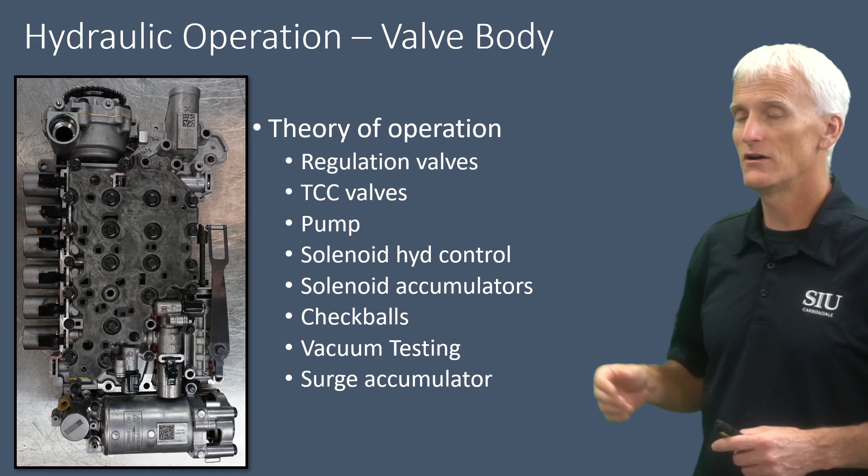We're going to look at some of the checkballs that they've got, really just pretty much where they go, do some vacuum testing, and then also look at this device there at the bottom. It's called a surge accumulator.

Starting out with the upper valve body, these are the valves that you'll find in that valve body. I've got them disassembled and kind of laid out. We're going to talk about a few of these things more specifically.

This clutch exhaust backfill is kind of an interesting valve there, and you're going to see that it pretty much holds some pressure into clutches when they're not applied.

We're going to look at the torque converter clutch valve, the lubrication regulator valve, the torque converter clutch control valve, and then on this end we've got the default override valve, actuator feed limit, which is a pretty common valve that we see in a lot of General Motors transmissions, really any transmission that has solenoids.

And the line pressure relief valve, that's a big spring with a ball behind it. And then the pressure regulator and the shuttle valve.

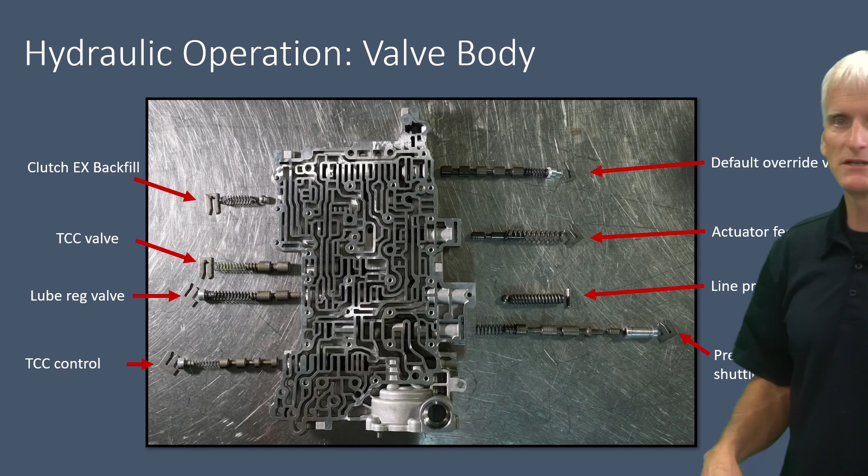The shuttle valve is something we'll pay close attention to because some of the aftermarket companies have created a replacement or drop-in item for that shuttle valve.

This picture just pretty much shows it at a different angle. This is our default override valve. If you take a look at this end plug here, it's got like a little stem on it, and that actually faces out. This actuator feed limit valve is not that uncommon.

We see that in a lot of different transmissions, and they feed the solenoids with pressure. Not every solenoid in this transmission, but many of the solenoids are fed through AFL, actuator feed limit. And there's a healthy spring that kind of works with that valve to create actuator feed limit pressure.

This is our line pressure relief valve. So if our line pressure ever gets too high, that will lift that ball off of its seat and relieve that pressure. And this is our pressure regulator valve.

So we've got a pressure regulator valve, and then down here we call that the shuttle valve, not to be confused with the boost valve. We see a lot of transmissions, a lot of these GM transmissions have these aluminum sleeves that have a boost valve in there. That's not what this is.

Now, line pressure does come around and sample on the end of this valve, and it does work up against this pressure regulator valve, but unlike a traditional boost valve where you might have a solenoid working against that boost valve, they don't do that on this. This is just a small valve that line pressure gets delivered into and works on this.

We'll look at these fairly close, so this isn't going to be the last you hear of these different valves.

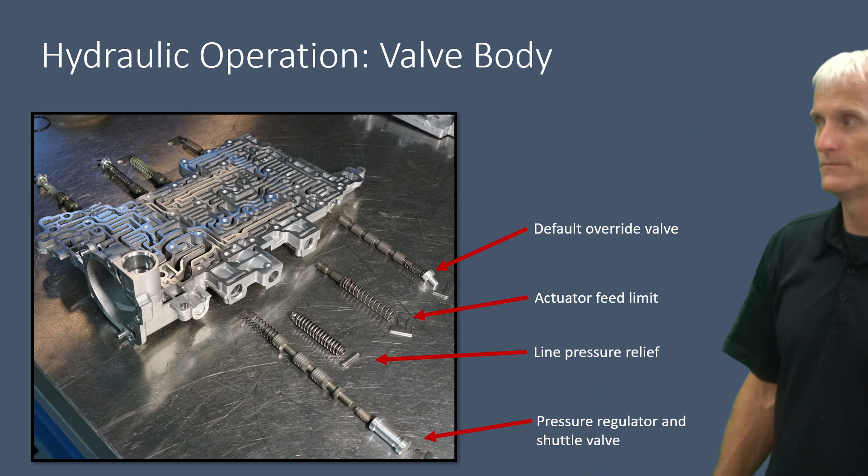Looking from the other side, once again, there's my clutch exhaust backfill, they call it, and it looks kind of like a pressure relief valve like we saw on the other side of the valve body with the line pressure relief valve, and it is.

It's just a check ball that's got spring force behind it, and the pressure that leaves this circuit here is going to fill what they call their clutch exhaust backfill circuits. Any clutch that's released, if it has the provision for it, is actually going to be filled with this clutch exhaust backfill. And then we have our torque converter clutch valve, our lube regulator valve, and our torque converter control valve.

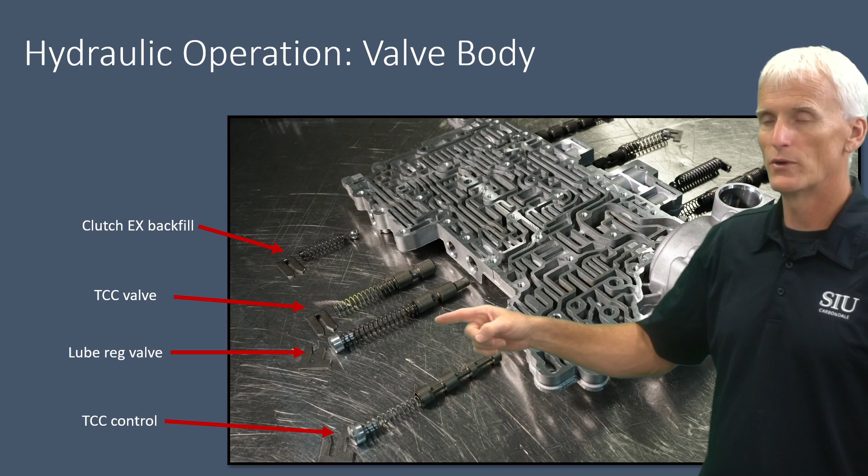Some of these valves you're going to see are addressed by these shift kits that these companies have, like the TransGo shift kit for the 8L90, or the zip kits, or just the individual valves that you can replace with Sonnax.

Now, looking at that actuator feed limit, if you've worked on General Motors transmissions, you'll know that the actuator feed limit circuit is nothing new. We see it on pretty much any electronically controlled transmission. And the term actuator feed limit can be misleading - it's really a solenoid feed limit. So what it does is receive line pressure, and that line pressure finds its way into the AFL circuit.

You can see the arrows going around, and pressure goes through this orifice number 12 and works against the end of the actuator feed limit valve. So once enough line pressure finds its way into the AFL circuit, it works up against the reaction end of that valve, and eventually moves its way over and cuts off the passage that feeds it.

Now, historically, the actuator feed limit circuits on these GM transmissions have had issues, basically with bore wear. The actuator feed limit spring is a fairly stout spring, usually with quite a bit of tension on it. And coupled with the fact that this is a balance valve, which means it's always balancing spring pressure and the pressure it lets into the circuit.

In this case the actuator feed limit pressure here - it's balancing these two. Once this AFL pressure gets up high enough, it cuts itself off, and then when pressure bleeds down, the spring returns it over, letting more line pressure in. So the fact that it's living in this position and maybe oscillating back and forth causes all the wear to occur pretty much where we see this valve positioned.

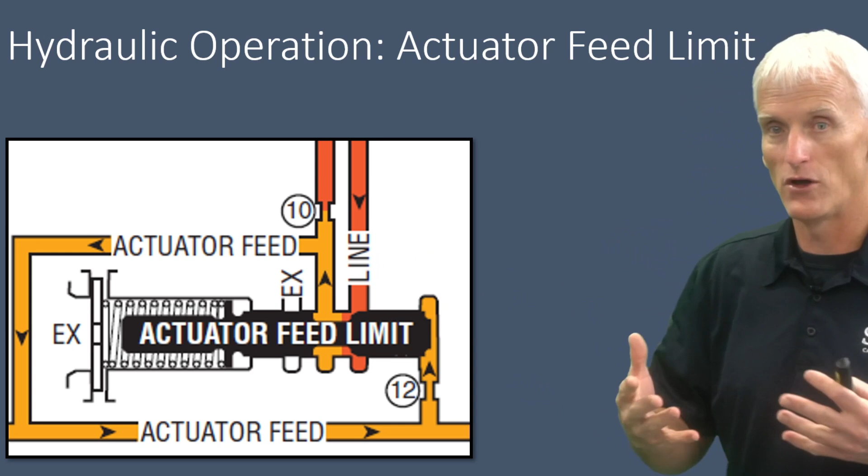So right now, the aftermarket - Sonnax and TransGo - as of right now, they're not addressing the AFL. Apparently it's not wearing that much on the 8L90. That's the only thing I can assume. Or maybe the addition of this number 10 orifice is keeping it fed with enough steady fluid volume that they're just not seeing pressure drops in this AFL circuit. Because this section right here is not something I've seen before, so I don't think it's very common, where they've actually got an orifice there that keeps the actuator feed limit circuit charged with fluid pressure.

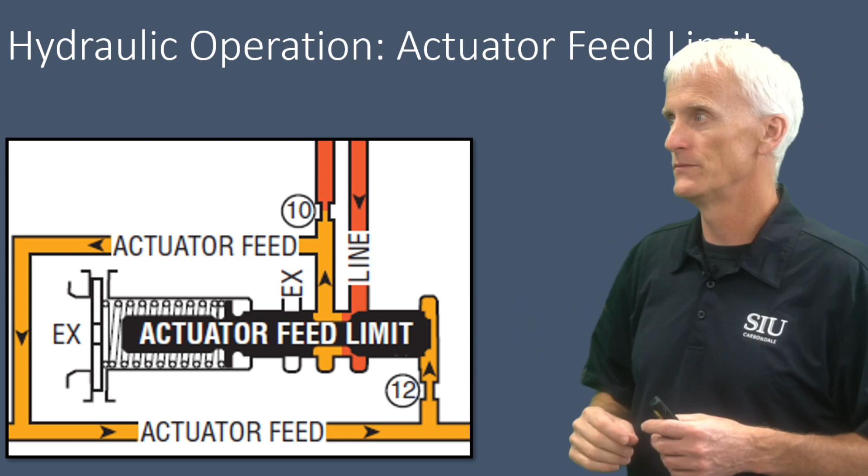And that might have to do with later on - we're going to see this exhaust backfill. Maybe that has something to do with it as well. But either way, maybe that's the reason they're not having to address this at all. TransGo and Sonnax - Sonnax makes valves, but it's not part of their zip kit, their drop-in kit - which kind of tells me that maybe it's not an issue as of right now.

Now, one thing to take note of is that if line pressure is below the cutoff point - let's say the cutoff point is 115 psi - if line pressure is only 60 psi, well this valve would be positioned to let all full line pressure in. So the AFL circuit would be the same pressure as line.

But once line pressure finds its way over that predetermined amount - and once again, using 115 psi as that number - anything over 115 psi, this valve would move over and block itself off. It would still be able to find its way in there through that orifice, but apparently this thing consumes enough oil, or passes enough oil, that the pressure shouldn't still rise above that maximum amount.

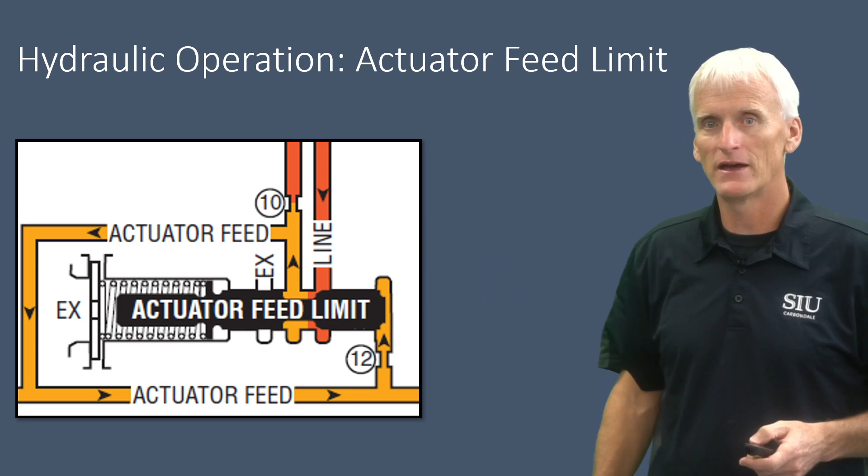So where does this AFL pressure go in this transmission? Well, as I mentioned before, it goes to the solenoids, and that's why some manufacturers call it a solenoid feed limit valve, or they might even call it a modulator valve. But regardless, it's a reduced pressure that finds its way to the solenoids.

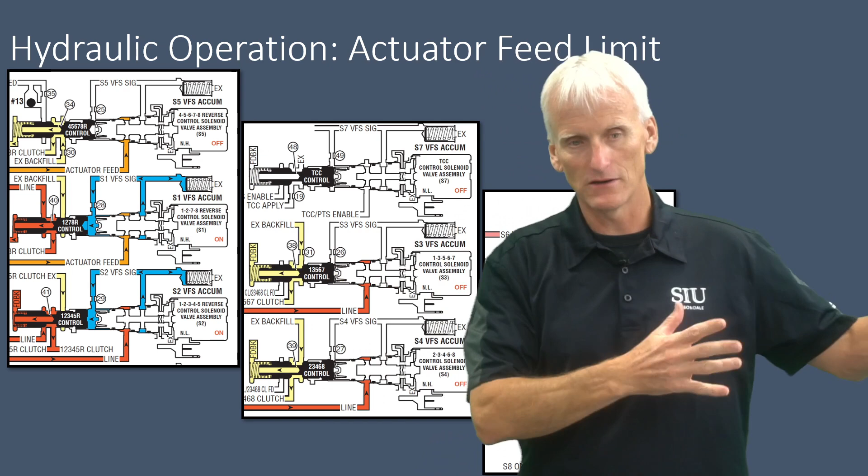Also right here it says NH, that means normally high. That means when it's just laying on a bench, no power hooked up to it, sitting there in a transmission completely unplugged, the solenoid's normally high, which means fluid pressure finding its way in is going to find its way right through and come out. The outlet's going to be high pressure - that's the normal situation, a normal state.

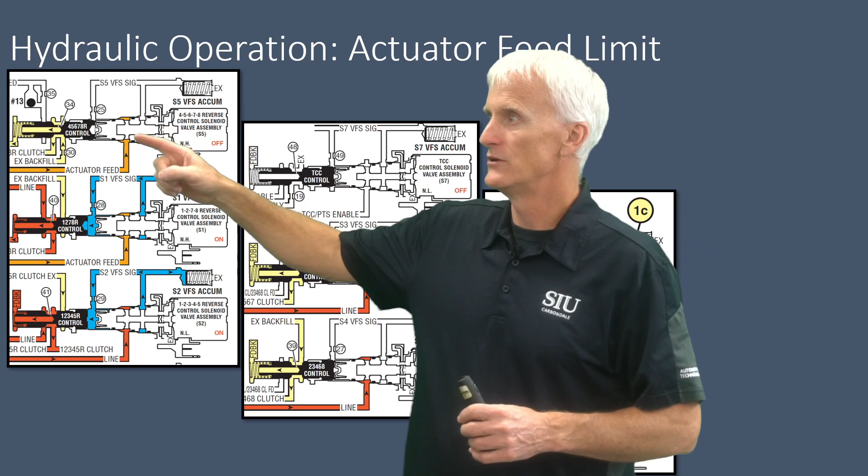If it was normally low, like you see some of these listed, that means in its normal state, I could have hydraulic pressure coming in, but nothing's coming out - low pressure is going to come out. In order for pressure to come out of this one, I have to energize it. And in order for a normally high solenoid to turn off hydraulically, I have to electrically turn it on. So that's what the NH and the NL mean.

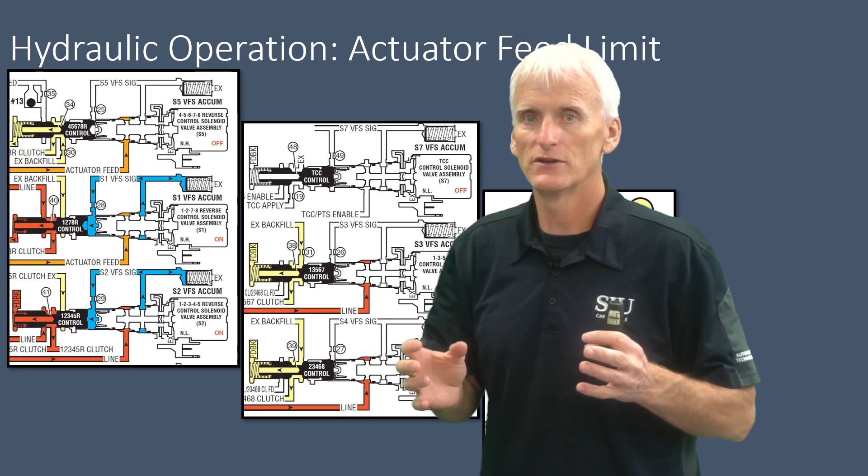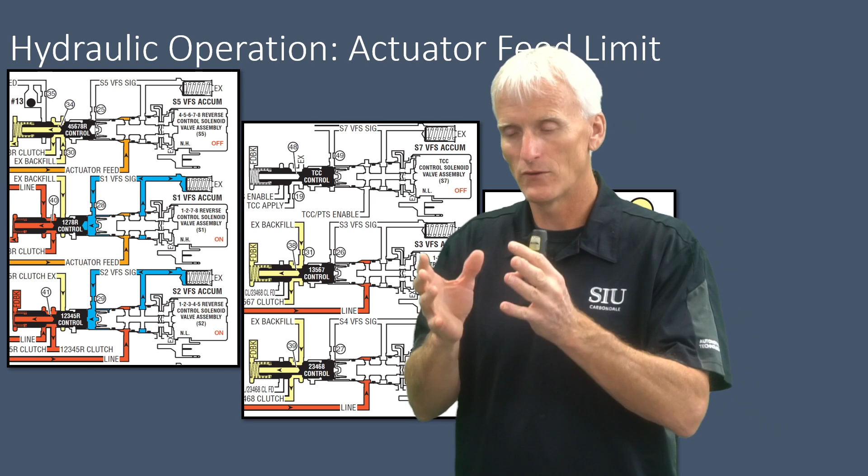So looking at these, they're either going to be controlling line pressure or AFL pressure by duty cycling these solenoids and regulating the amount of pressure that finds its way through, and they feed over to these individual pressure regulator valves for these individual clutches. The hydraulics on this transmission are actually really simple when you stop and look at it, because they've got a solenoid controlling a regulator valve, and the regulator valve controls the clutch directly. So each one of our clutches has its own dedicated regulator valve.

So the 8L90 has a kind of unique circuit here. They call this the exhaust backfill circuit. And it's not like some of their other transmissions, where they use what they call a compensator circuit.

If I have a hydraulic piston, and that piston is stroked with line pressure, well, on the spring side, to return that piston, not only do they have a spring, but they use fluid pressure to kind of keep that pushed off. It's not high pressure or anything like that, but they keep it filled up. Especially on our driving clutches that are always rotating, the idea is that if centrifugal force is trying to hold fluid in that drum, and with greater RPM you might build pressure in that drum, well, if you have fluid on both sides of that, it'll kind of cancel each other out.

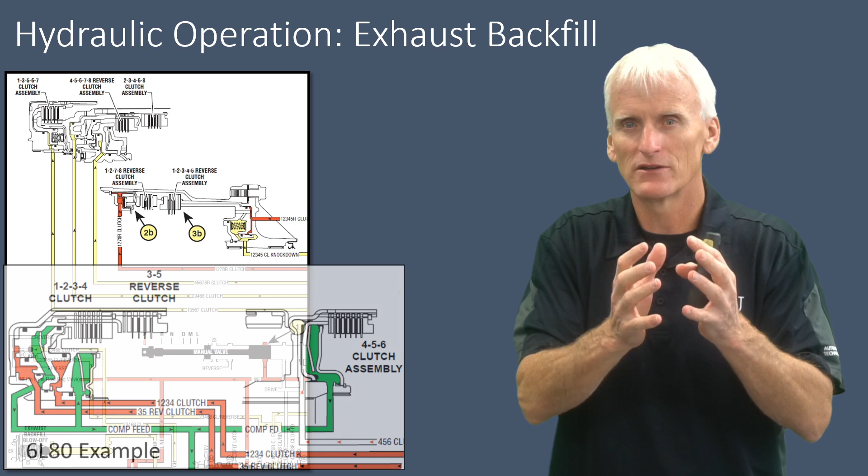Well, this transmission doesn't use that. They just use the spring to return the piston. But what they do is keep the hydraulic circuits filled up with fluid, at a very low pressure, like 7 or 8 psi. And it's done through this exhaust backfill circuit.

So here you can see on the hydraulic schematic, these are the driving clutches, the input clutches. You can see they're all yellow right here because none of these clutches are applied in this picture. But what they do is have hydraulic pressure going into that, called exhaust backfill. And as you're going to see in this little video I've got coming up, I tried to figure out how much pressure was in the exhaust backfill circuit, and it's not that much.

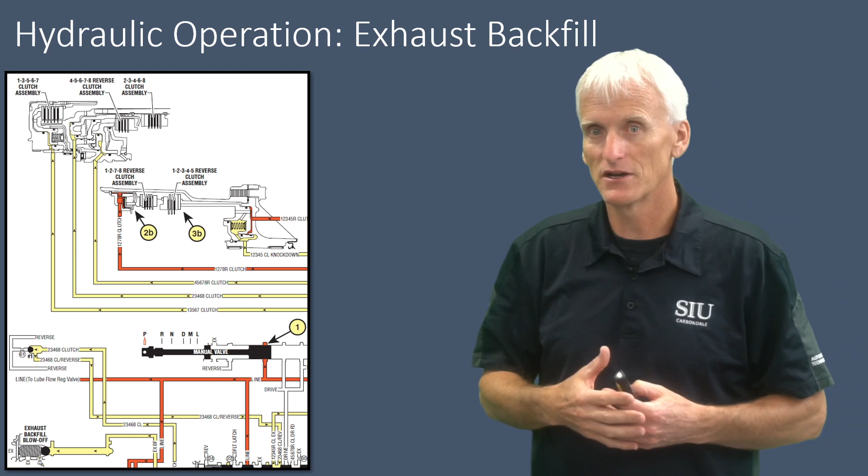The way they feed this clutch exhaust backfill is they've got actuator feed limit pressure finding its way through this orifice 11, and that ends up filling the whole exhaust backfill circuit. If the pressure starts building up over a certain amount, the blow-off valve they've got there will unseat and prevent pressure from climbing any higher - like I said, it's real low, like 7 or 8 psi.

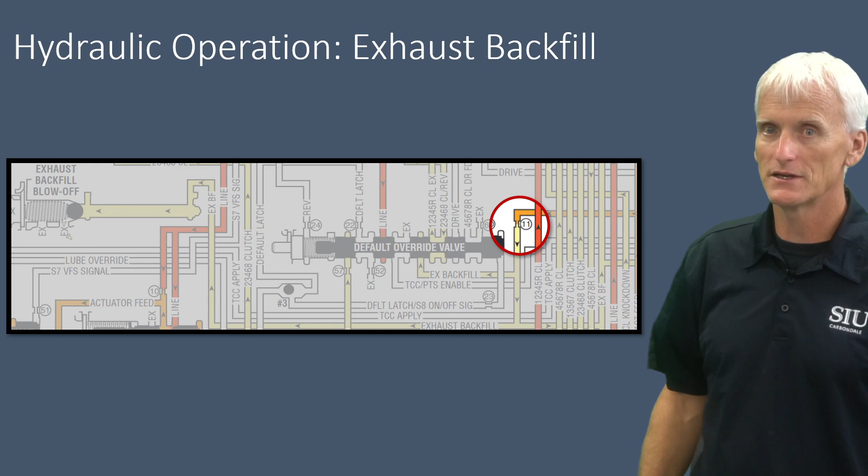Now looking at that exhaust backfill circuit, they have a hole in there that's about 290 thousandths of an inch in diameter, maybe a little smaller. The pressure, or this checkball, seats up against that hole. The pressure that finds its way through that hole is AFL pressure, and it pushes that ball off of its seat and leaks out after that. The AFL is fed through an orifice, and this circuit is after that orifice.

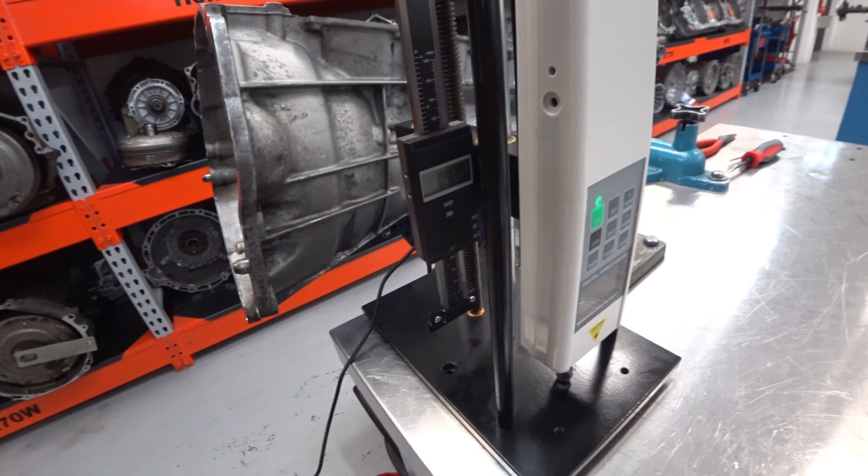So it's basically regulating anything beyond that orifice to a pretty low pressure, and I was curious what that pressure was. At the depth that ball sits in there, about 1 inch 220 thousandths from this edge, and when we put that spring in there and that clip, it compresses that spring to about 920 thousandths, which isn't that much. So I went and compressed that spring to 920 thousandths of an inch, and as you can see, it's about a half pound of force at that compression.

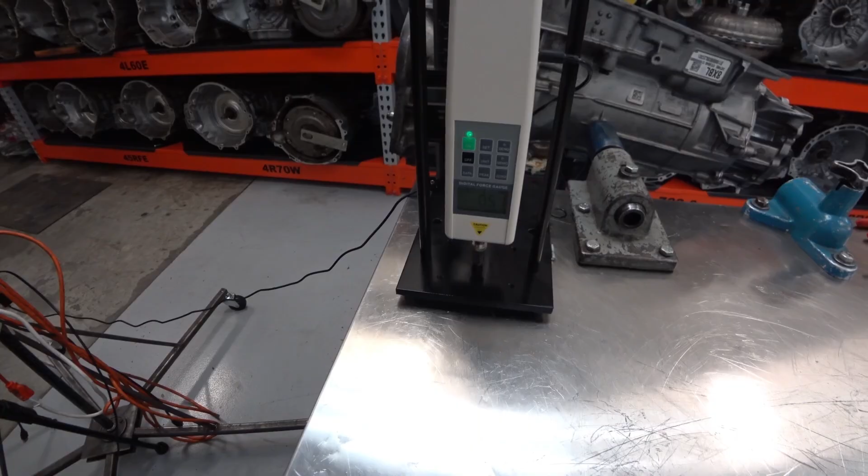When we do the math and take that 290 thousandths hole and figure out the surface area, which is pi times radius squared, that ends up being a pretty small surface area - it's 0.066 square inches. When we divide that into the half pound of force against that spring, we see that circuit only requires about 8 psi to push that ball off its seat and start regulating the pressure down. So really that backfill circuit only has about 8 pounds of pressure in it. So in case you're wondering, when you're looking at a hydraulic schematic and you see that listed as exhaust backfill, that's only about 8 psi in there.

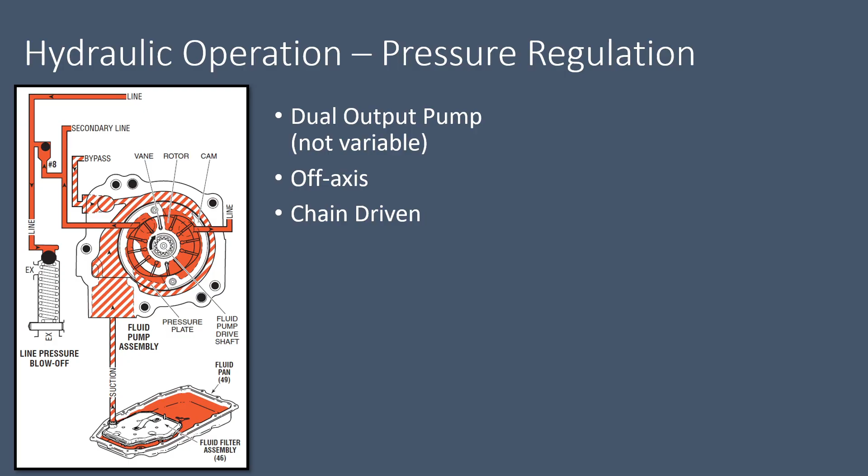So that clutch backfill circuit's a little unique. I thought it was worth mentioning because I haven't really seen that in any other transmissions before.

Now we're going to move over to pressure regulation. You can see this is their oil pump, and it's an off-axis chain-driven pump - saves a little bit of length on that transmission by doing that. It's also a dual output pump. It's not variable, which is something we're used to seeing on most General Motors oil pumps, having a variable output type pump. But here they don't have that - they just have a dual output pump. You can see the suction coming in, and then it generates pressure coming out, and there's another inlet right there, suction coming in, generates pressure coming out.

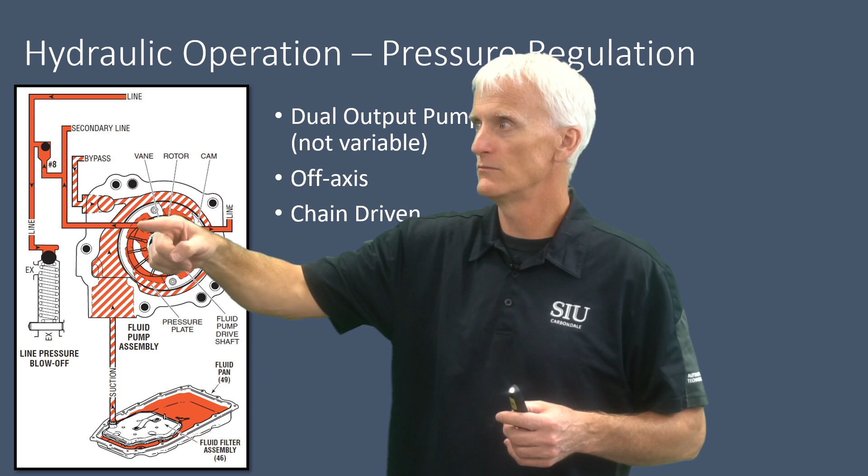So that secondary line seems like it has a little bit more of a suction and compression mode, whereas this primary, it looks like it just kind of comes in and almost immediately gets pushed out. I don't know, probably for a volume situation they've got going on there. But that's a little different, this dual output pump.

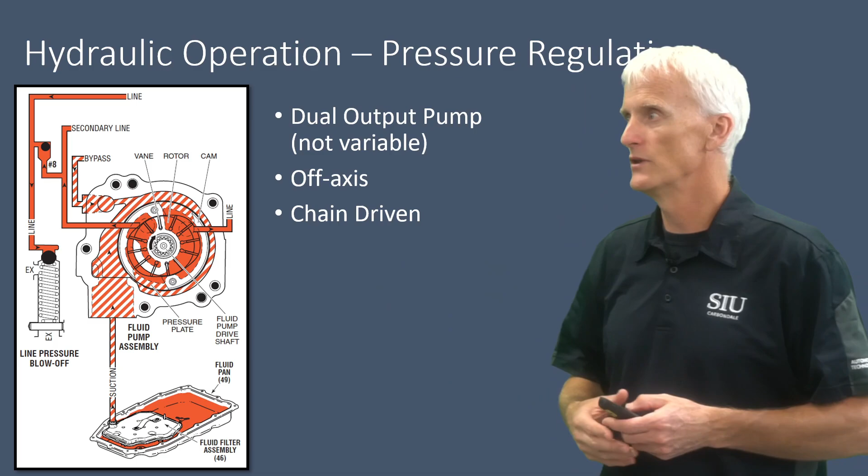So how does this pump operate, and how do we regulate pressure in this transmission? Well, the fluid finds its way in from the pan through the filter and feeds into this circuit here. But we actually do have a couple other hydraulic circuits in here, and they're these bypass circuits, and it basically comes from the regulator valve. Once this thing gets into a position where it's generated enough pressure, this regulator valve is going to open up what they call a bypass, where it's going to let any additional line pressure that's generated find its way right back into the inlet of the oil pump.

Because if you're delivering more than what you need and you turn around and deliver it to the inlet, you're not going to generate any more pressure. You're just kind of recycling, if you will, the inlet pressure. And so depending on how they want this transmission to operate, they're showing you two examples - this is example A, this is example B. This would be like low pressure.

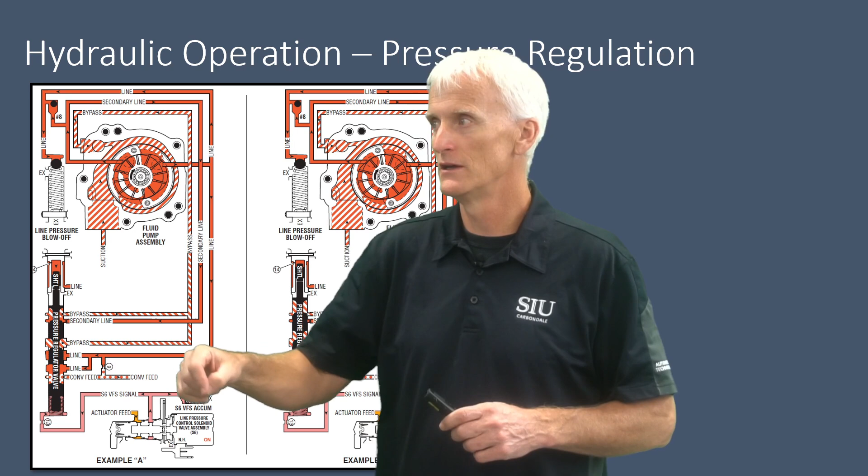Now, if I want more pressure in this transmission, you can see like in this example B, they duty cycle this pressure control solenoid to deliver more of this pressure or signal fluid or AFL fluid, whatever you want to call it, to the bottom of the pressure regulator valve. And in this illustration here, they're showing it shuttled all the way up to the top. And what that's done is that's blocked off these bypass passages.

So now the fluid can't find its way. The line pressure that's generating, there's no excess yet, so it's not turning around and dumping it back into the inlet. It's kind of cut that off. So instead of turning around and creating a massive leak going back to the inlet of the pump, what they're doing is they're letting the pressure build up in the circuit.

And once they build up enough pressure, that line pressure climbs high enough, it will in fact push this valve back down and start opening up these bypass circuits.

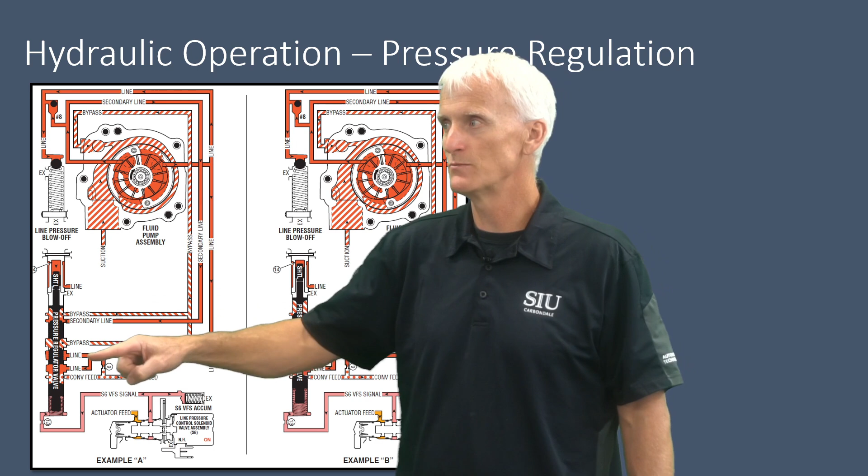And if you take a look, something that's unique here is that since it's a dual output pump, you can see the bypass kind of open up at different points. Like this right here, the secondary line is wide open into the bypass. So it's pretty much anything that's, for this low pressure example, anything that finds its way into the secondary line is just going to turn around and find its way right back into the bypass. Where you can see the line pressure is just barely uncovering the bypass passage on the low pressure example.

But then when we switch over to the high pressure example, that line pressure cannot find its way into the bypass. It's being blocked by that valve. And then maybe we're just barely uncovering, or we're still blocking, but eventually we'll first start to uncover the secondary. And then if we've got enough volume that we can end up just moving this valve back down.

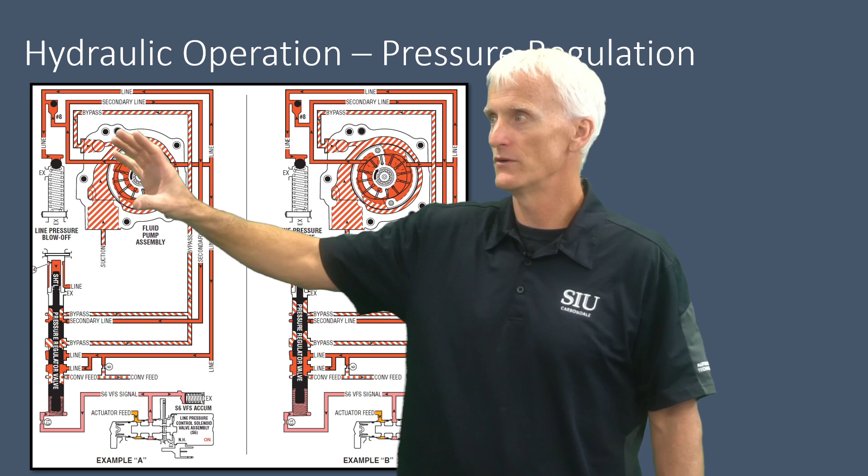But it's pretty obvious what they're trying to do here. They're using this one portion of this valve or this pump to generate the majority of the pressure. And if needs exceed what the output of the pump is, they'll revert to the secondary side by controlling the secondary portion of this pressure regulator valve and blocking it off so that that fluid can't get dumped off into the bypass as easily. So that's how they're doing it.

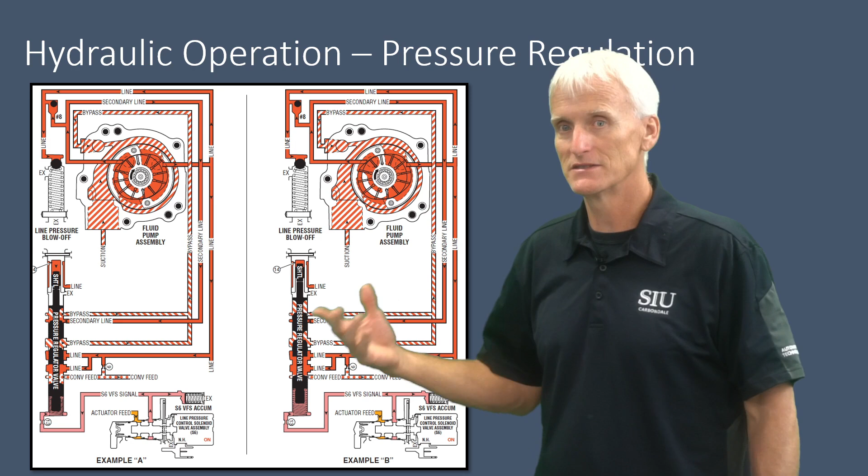It's a little different than what they've done in the past. They've relied heavily over the years on variable output or variable displacement pumps, but now they've got this dual output pump, and it seems to be pretty good, pretty cool.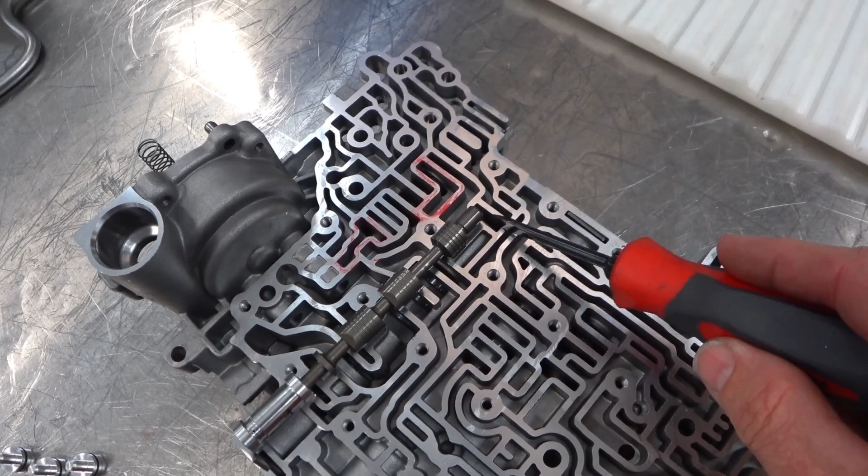This is the solenoid passageway here that's going to be working on the end of this pressure regulator valve to move this valve into its regulating position. This is converter feed right here, and line pressure would exist in these two passages. So you can see line pressure has its way of getting into the torque converter feed.

This chamfer on this valve feeds line pressure into the bypass section once we are at its regulating position. And if you look, this one is kind of in that valve body land right there. We also have line on this passage right here, and you can see it's more open, feeding into the bypass. So there's two bypasses, this portion and this portion, and two line pressure feeds, this portion and that portion. It looks like this one allows it to bypass first, and then that one, if it strokes further, will bypass second. Right here in this passageway, that feeds the shuttle valve.

So the shuttle valve we have here on the end—when line pressure finds its way into that section, it's going to work on the end of that shuttle valve and move this valve over, eventually getting it to the point where these passageways allow line pressure to dump into the bypass and effectively regulate the pressure.

If you're working on a vehicle that has this start-stop technology or idle stop, where you come to a stop and the engine shuts off—the thing that everyone hates—you're going to end up having this surge accumulator in this transmission. Some of these transmissions or vehicles don't have it, and they won't have it. If you don't have it, you won't have it. But some of the vehicles that have idle stop, or all the vehicles that have idle stop, will end up having this.

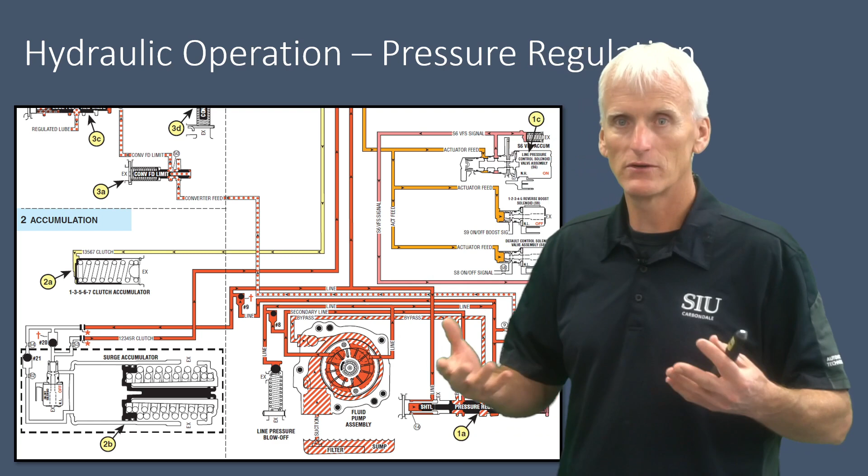Now the kits that I have didn't come with seals for this, so that's something to take into consideration. But the way it operates is that when the vehicle is running and we're generating pressure in the transmission, there's going to be a feed—it's going to feed line pressure into that accumulator, and it's going to unseat that check ball. If you follow that around, it fills this void right here and strokes this piston up against spring force.

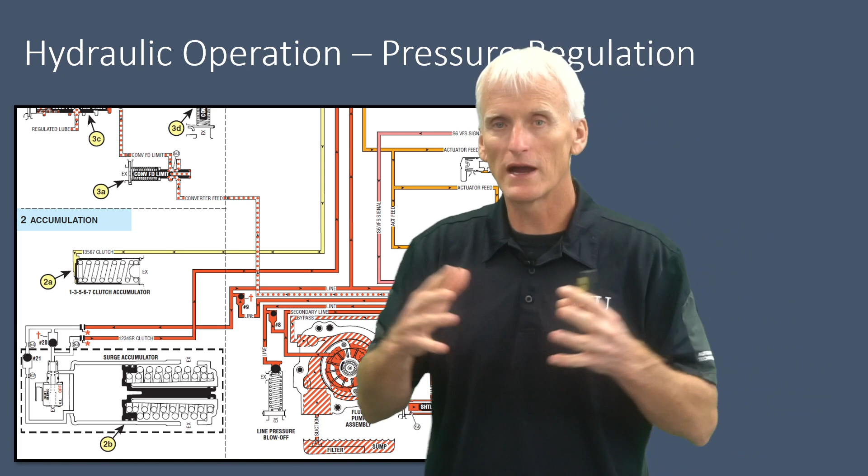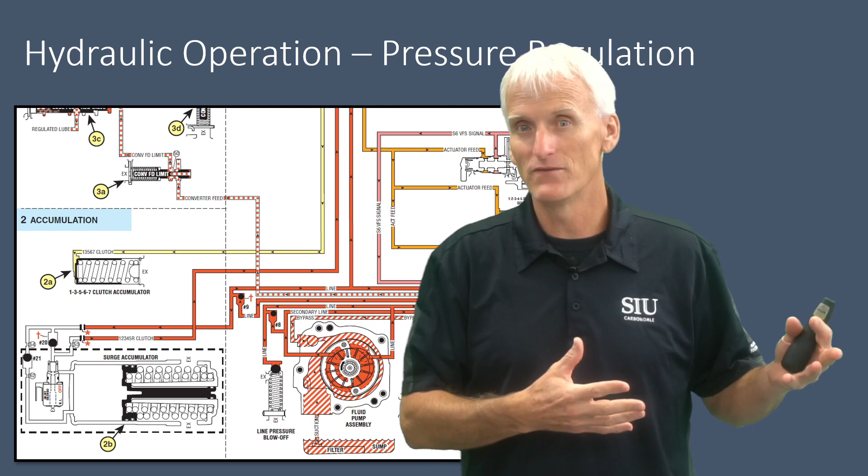That way, when the vehicle shuts off and the engine shuts off, and now I don't have my oil pump running anymore, they can energize that solenoid and deliver that fluid pressure to the 1, 2, 3, 4, 5R, and also fill some of these line pressure circuits up with fluid pressure. Like I said, it doesn't have to be a lot of pressure—we just need to keep these circuits primed and filled with something. So when you take your foot off the brake and the engine fires up, pressure can build up instantaneously. We don't have to deliver any volume to anything, we just need to build pressure. So that's kind of the goal of that.

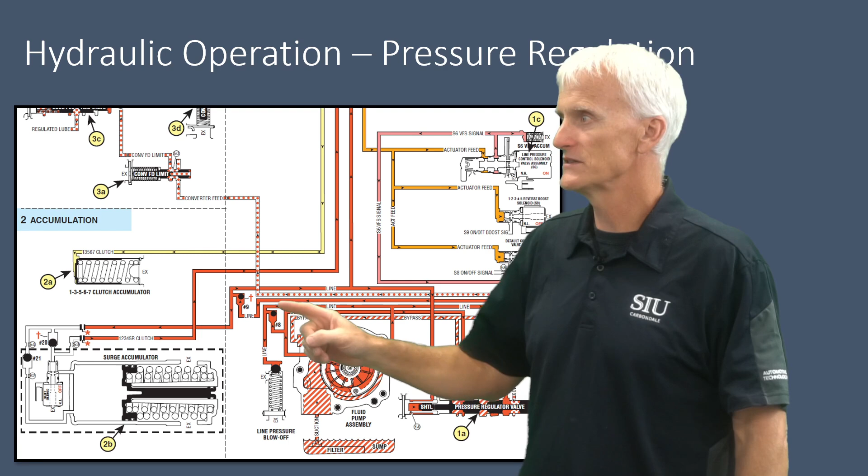That's the reason why it's kind of got these dashed lines out there, because it may or may not have it. On a hydraulic schematic, some of these little crosses or stars usually indicate that it may or may not have it. And that's basically how this thing operates—the surge accumulator.

So now looking at this portion of the valve body, this is the solenoid portion of the valve body, and you can see I've got all my solenoids listed here, the torque converter clutch and the 2, 3, 4, 6, 8, and what they have, looking at all these different solenoids, they've got the solenoid, and then they've got a regulator valve, and then a spring.

And all these springs pretty much are the same. They all look the same, except for this one right here, the torque converter clutch solenoid and regulator valve. It's got some thicker coils, it's a little shorter, and has higher tension. So just keep that in mind, because when you look at them all next to each other, they pretty much look the same. We'll cover those here in a second.

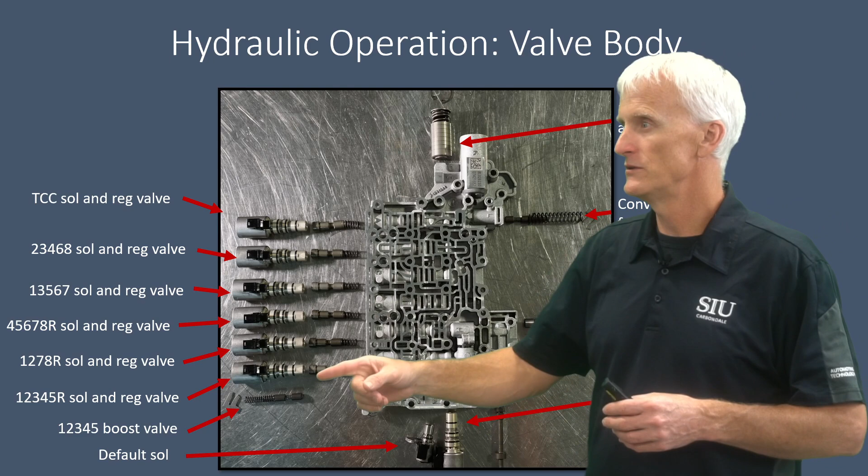This is the 1, 2, 3, 4, 5 boost valve, converter feed limit valve, and that's something that's addressed in some of the aftermarket kits. This is really the only real accumulator we've got in the transmission. We got this 1, 3, 5, 6, 7 accumulator and spring, and you can actually get a replacement accumulator in a kit for that.

The line pressure solenoid is down here, and we've got these on-off solenoids, the default solenoid and the 1, 2, 3, 4, 5, R boost solenoid. Those are all located in the solenoid valve body.

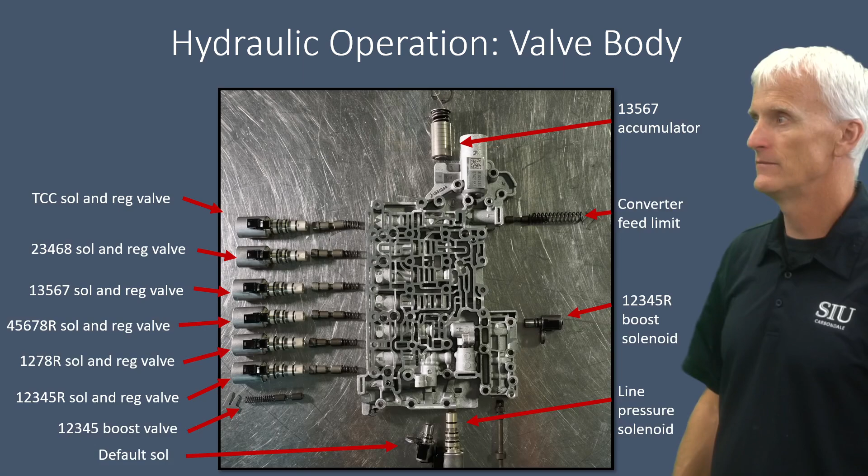Another different view of this same valve body, this here is the solenoid side. I kind of had those laid out there again for you. But I did put a note up here, in 2018, 2019-ish, they actually did change things. I know I've got a 2018 unit here, and it does have that.

On the 2, 3, 4, 6, 8 regulator valve, you'll notice it's completely different. The design of it, so it's basically this one right here. That valve is much thicker all the way through, and they've got identifying slots. They got 2 slots. Most of them have nothing, or they have 1 slot, like a big, almost looks like a screwdriver slot they have on the end. But they put 2 of them on that. You can see it stands out as a completely different valve, and so they end up changing some things.

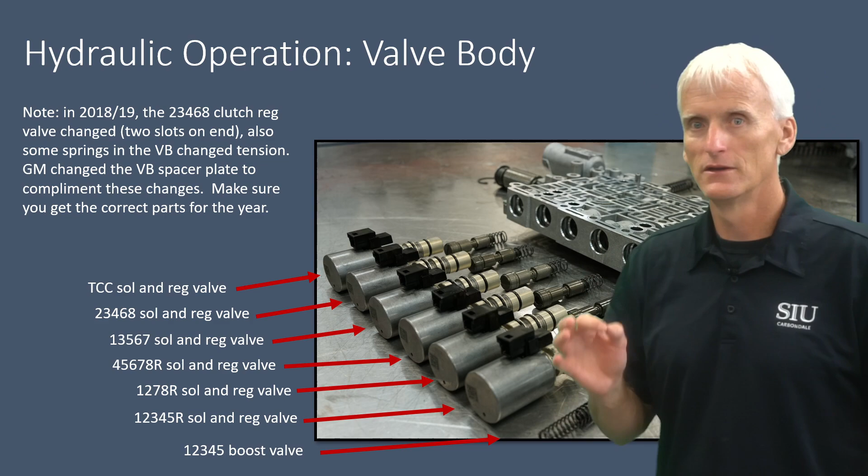They changed some spring tensions, valve body, spacer plates, and all that stuff. So make sure if you're dealing with that 2018, 2019 year range that you're getting the right parts. Best to order parts, if you're doing it through the dealer, use your VIN number.

So like many manufacturers, this valve uses a tiny little hole right there in between these valve lands, and that pressure, the line pressure that finds its way into that section, finds its way out through the end of that valve and works on the end of that valve to move this, to shuttle it. And it's going to work with that tiny little spring that they've got that goes on the end. So that spring pretty much helps line pressure move this valve.

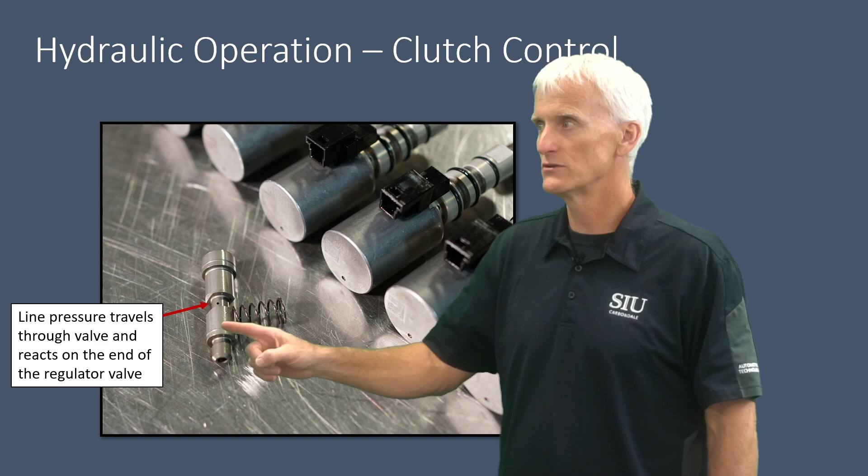So all these pressure regulator valves work pretty much the same. In the little clip I'm going to show you here in a second, I use the torque converter clutch solenoid and the torque converter clutch valve to explain how pressure operates. But it's the same with the torque converter clutch as it is with all the different clutches that we have in the transmission. Basically what they have is they have a solenoid.

It's going to receive either AFL or line pressure. That solenoid is going to manipulate pressure to work against the end of that regulator valve. And right now, like you can see, line pressure can turn around and find its way right into that clutch circuit. And the line pressure that finds its way in there is going to shoot its way through the end of that valve and work across the surface area in the back of this valve to move it over to basically regulate or cut its own supply off.

So it'll build pressure up to the point, at least during the shift, they're going to use this to kind of control how pressure rises in the clutch. They're going to control how the line pressure can find its way into this clutch circuit. Now, if this solenoid was de-energized, we don't have any hydraulic pressure at all in here, and this spring returns this valve into its resting position, this exhaust backfill would find its way into that clutch. That's the reason why all the released clutches, except for one, have exhaust backfill going to the clutch circuits.

When they operate the solenoid, they're basically going to regulate how much line pressure can find its way into that clutch circuit. Of course, once you're in the gear, they just let full line pressure go to the clutches. But they manipulate the solenoid to manipulate the pressure to the clutches during the shift to get the clutch feel the way it's supposed to be.

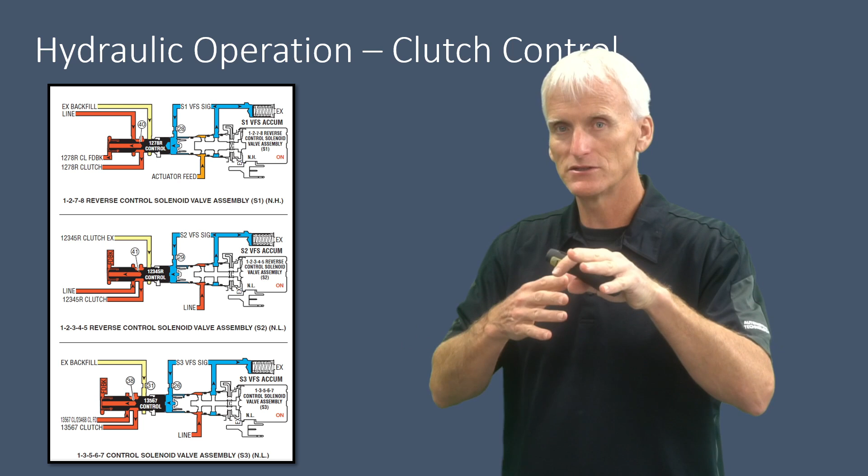Remember what we talked about with the mechanical operation and the overhaul, these are clutch-to-clutch units. So as I apply a clutch during a shift, I have to release a clutch. I can't release a clutch too soon or apply a clutch too late because then I'll have nothing applied and it'll flare. But the same thing holds true - I can't hold a clutch on that I'm releasing for too long, or apply a clutch too quickly, or else I'll put the transmission in a bind.

It's real precise how they have to operate these solenoids and these clutches, and everything's tied together - the solenoid operation, the pressure that finds its way over to these regulator valves, the clutches themselves and the clutch pack clearances. The computer has to be doing its thing like it's supposed to, line pressure needs to be where it's at, and AFL pressure needs to be where it's at. All these things need to work in harmony, and if they're not, you're going to end up having flares and binds and weird shifts. Now, all I can say is if you have a lot of shifts giving you problems, you're probably dealing with something overall, like a line pressure issue or an AFL pressure issue.

But if you're dealing with one specific shift that's dealing with one solenoid circuit or one clutch circuit, you'd be focusing on these areas specifically.

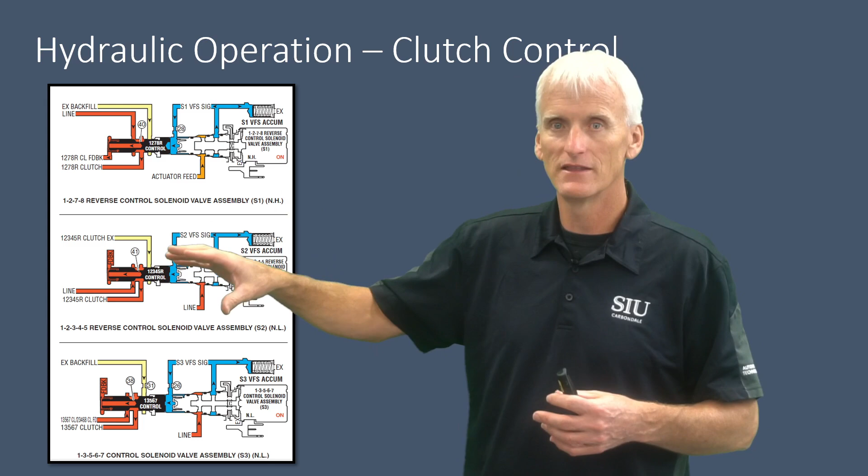Going more off that hydraulic and clutch control, this is kind of what it would look like. I have labeled out these passages here. That's the feedback passage. When line pressure finds its way in through that hole and finds its way to the end, it's going to work into this feedback circuit, which is basically just pushing against the end of the valve to move it over and put it in a position where line pressure can't find its way into the clutch anymore.

And then if they want more pressure going to the clutch, the solenoid pushes on the end of this valve with hydraulic pressure, and that moves the line pressure or the valve over so line pressure can find its way back into the clutch circuit. And then it goes through the tiny hole, goes to the back, and builds up pressure until it can shut itself off again.

Now, if this solenoid is completely off, kind of like it's drawn right now, the backfill circuit can find its way into that clutch circuit. So that way we can keep that circuit filled up with 7 or 8 psi when it's not being used.

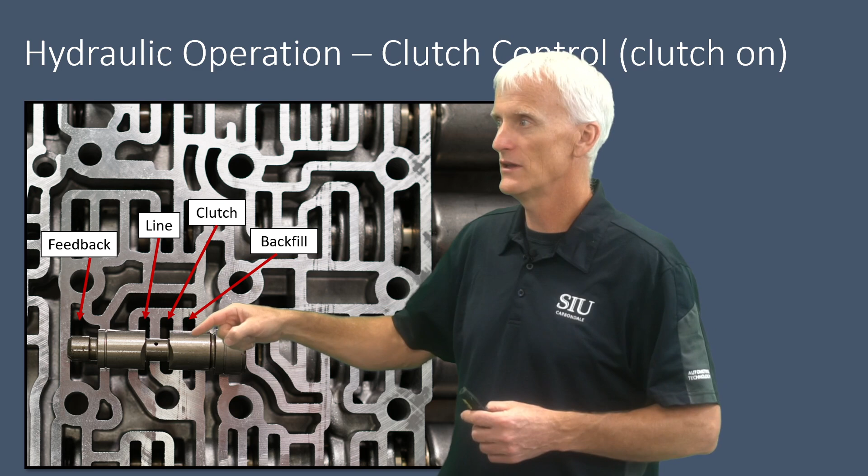In this situation here, we've got full line pressure going to a clutch. So I've got my line pressure finding its way in, right into that clutch circuit. The exhaust backfill is completely blocked off, it's not being utilized at all anymore. And yeah, there is pressure going here to work on the end of the valve, but the solenoid pressure that I've got on this end is high enough to the point where I can't overcome it with whatever line pressure I got working across that small surface area that I have at the end of the valve.

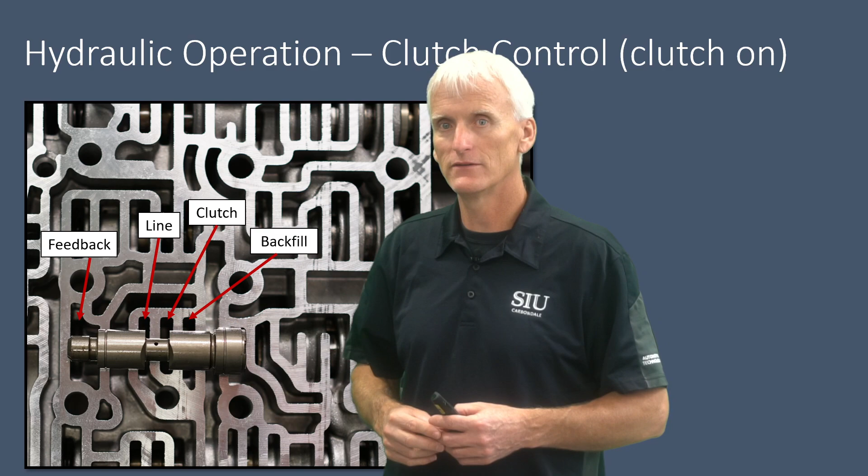As I mentioned, not all of these valves are the same size. Pretty much everything on the solenoid side is 530 thousandths, thereabouts. Yet the reaction side, the side that the clutch pressure and spring pressure work with to cut the pressure off in a sense, those are different sizes. A lot of them are 442 thousandths, but we've got some that are 423 thousandths. So there are 2 different size valves.

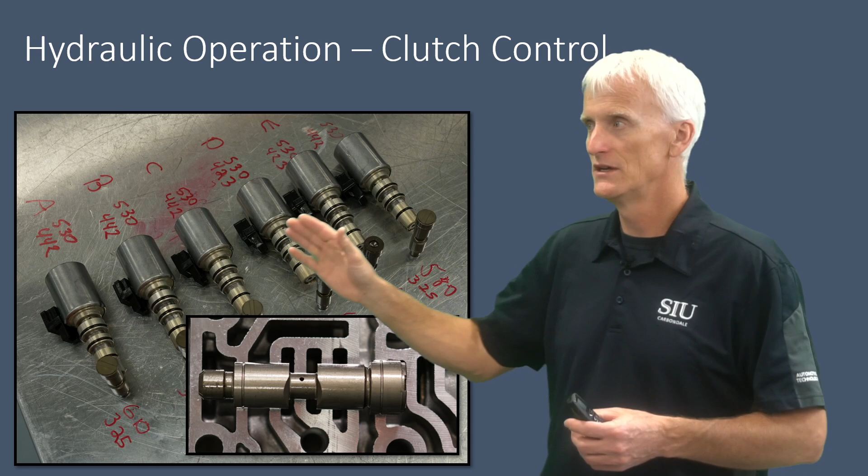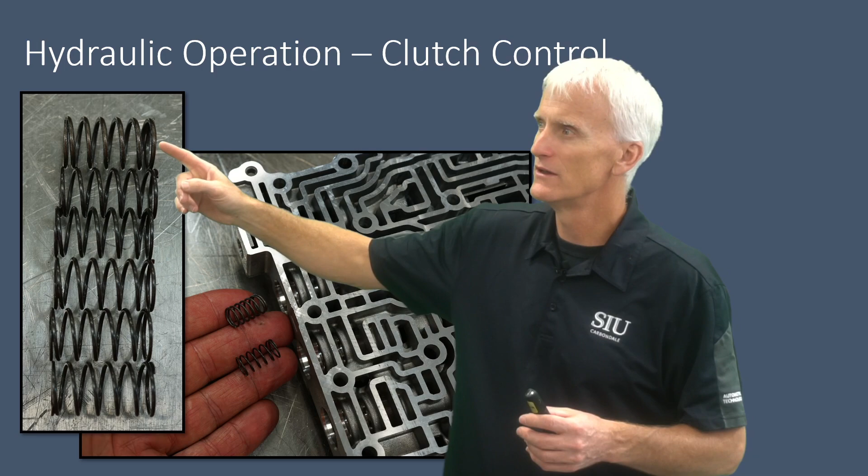And like I said before, the only spring that's different between all of these is the torque converter clutch solenoid, which utilizes a little stiffer spring than the rest. It's kind of hard to tell - looking at this, can you tell which spring is different from the other? You might be able to notice, but that one right there is a little thicker and a little shorter than the rest.

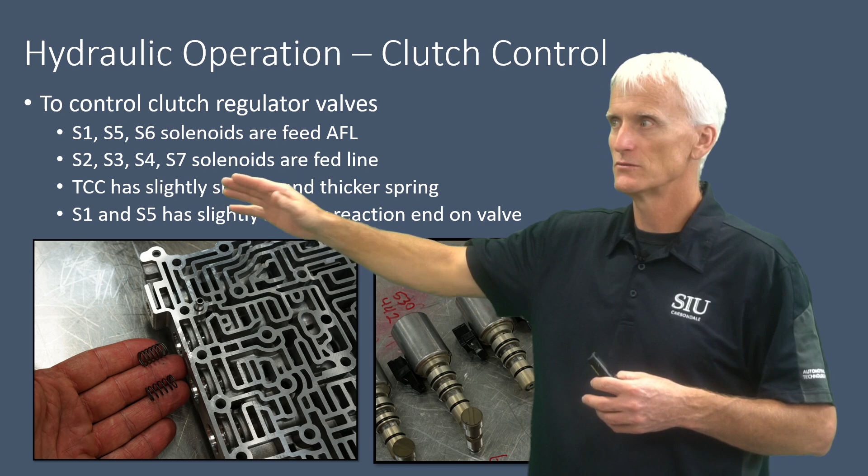So as a summary, solenoids S1, 5, and 6 are fed AFL, while solenoids S2, 3, 4, and 7 are fed with line pressure. The torque converter clutch has a slightly smaller and thicker spring, right there. The S1 and S5 have a slightly smaller reaction land, so the actual reaction land that the spring works with is a bit smaller on those two. S6 is line pressure and S7 is torque converter clutch pressure, but S1, 2, 3, 4, and 5 are clutch 1, 2, 3, 4, and 5.

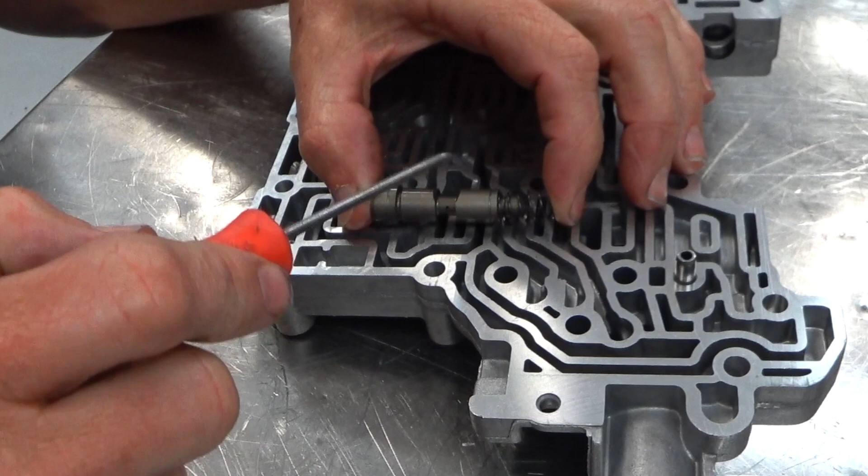It's the way this regulator valve works, and in this case it's the torque converter clutch solenoid. The valve is sitting here as such, and in this passage right here is line pressure. This passage is the torque converter clutch, and this passage is exhaust.

Right now line pressure can't get anywhere because it can't get past that spool. So what happens is when the solenoid that lives behind it receives pressure, basically line pressure, it delivers that to the end of this valve. It strokes the valve over, and when we start letting line pressure into the torque converter clutch circuit, that pressure finds its way through that little hole, comes to the back of the valve, and works with the spring to return it and close it off to the point where no more pressure can get in. If they want more line pressure, they'll duty cycle the solenoid higher and build more pressure on this end of the valve, on the solenoid reaction land.

That moves the valve over, letting more line pressure into the torque converter clutch circuit. That additional pressure finds its way over and works with that spring to move the valve closed again. So it's always a competition between the solenoid pressure on one end of the valve and the torque converter clutch pressure that found its way to the other end, plus whatever that spring is helping it with.

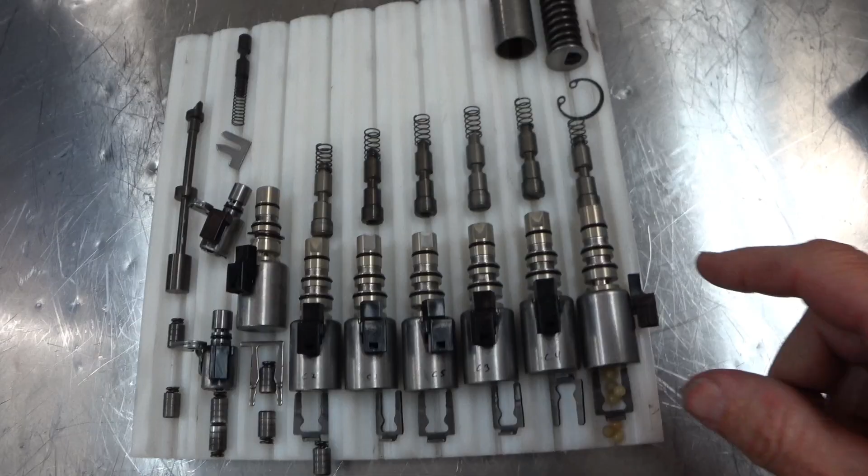Basically these springs are little helper springs. That basic premise works with all these different regulator valves for all these different clutches. They're really doing the same thing as far as delivering pressure from the solenoid to the end of the valve. The pressure that it lets into the circuit works with the spring to close that circuit off. The more solenoid pressure they create, the more pressure finds its way into that clutch circuit until it can close itself off. I used this torque converter clutch regulator circuit as an example, but all these valves pretty much operate the same way, and those fundamentals apply to any one of those clutch regulators.

Like some of the other GM transmissions, this transmission also uses these little solenoid accumulators. You can see that one's worn out pretty bad — see how shiny it is right there? It's not supposed to look like that.

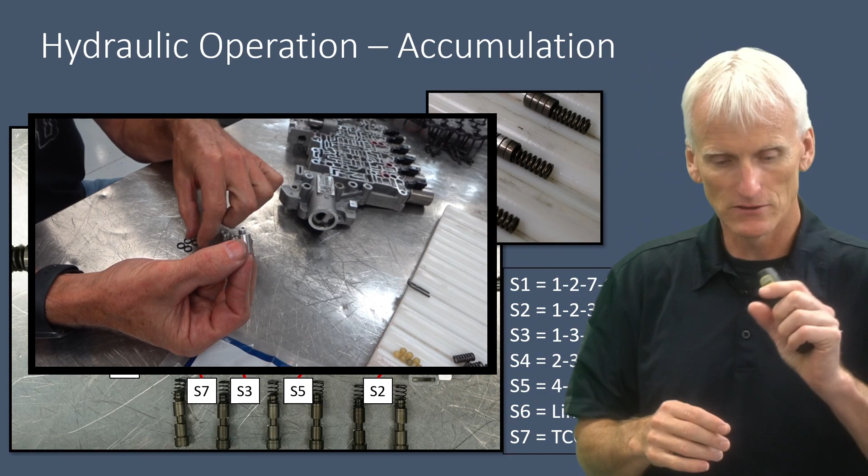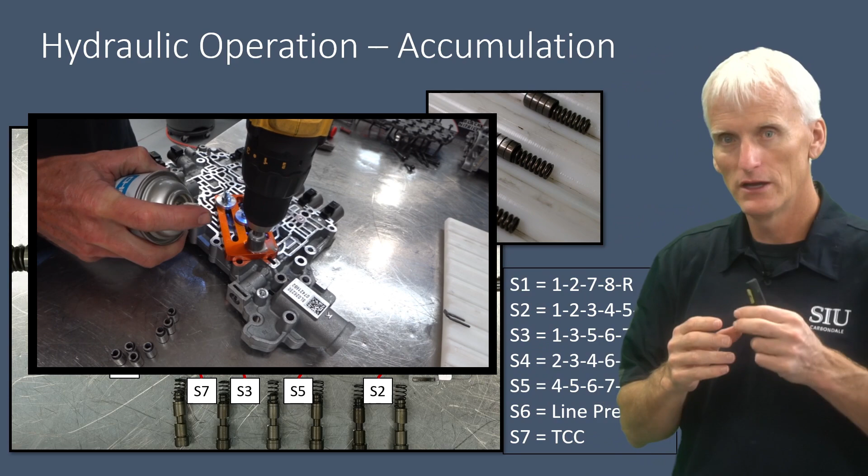So the aftermarket has come up with fixes for that. We've got drop-in replacements — Sonnax makes these little sleeves with springs and pistons that fit in there. TransGo and Sonnax both also offer a reamable option where you can ream out the bore and drop in a new plunger and valve. You can see they've got a variety of them. They're tiny little accumulators, mini accumulators that operate with the solenoids, so they dampen out the solenoid operation.

So it's important to look at those. If I'm having an issue with any one particular clutch, like the 1278R or the 45678R possibly that I'm dealing with — let's use this one as an example — if I'm having an issue with my 3/4 shift, maybe it's quite possible I'm dealing with an S5 accumulator, which is right there. If I take that out, and if that happened to look like that, then quite possibly I found the root cause for my issue.

Because if that solenoid is trying to create pressure to control its regulator valve, but my little accumulator is worn out and that pressure is all leaking out past it, that means it's not working the regulator valve like it's supposed to, and I'm not going to get the shift quality that I'm expecting.

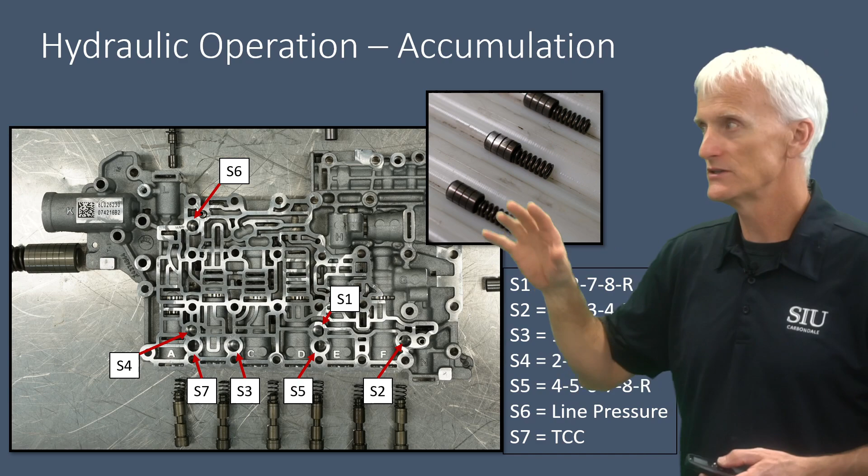So it's important to inspect these things. When we go through and do vacuum checks, you can actually vacuum test these different circuits here to see if there's excessive leakage behind any of those.

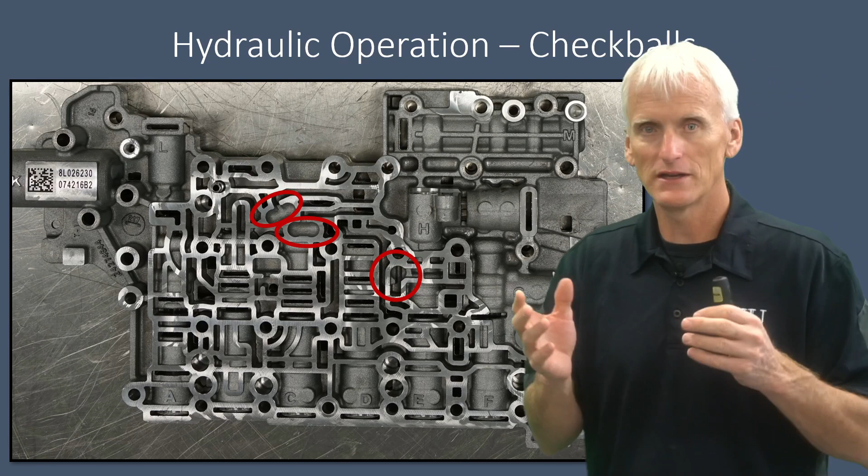The check balls on this transmission are plastic, so you definitely want to replace those. If you look at the kits, they all come with new check balls. GM's been using these plastic check balls for years now, 6L80, 6L90, and they do have a tendency of shrinking. It's more than likely they're spinning in there and slowly shaving themselves down, so you don't want to take the chance of putting it back together with used check balls that might be a little smaller than they should be. Just go ahead and put the new ones in.

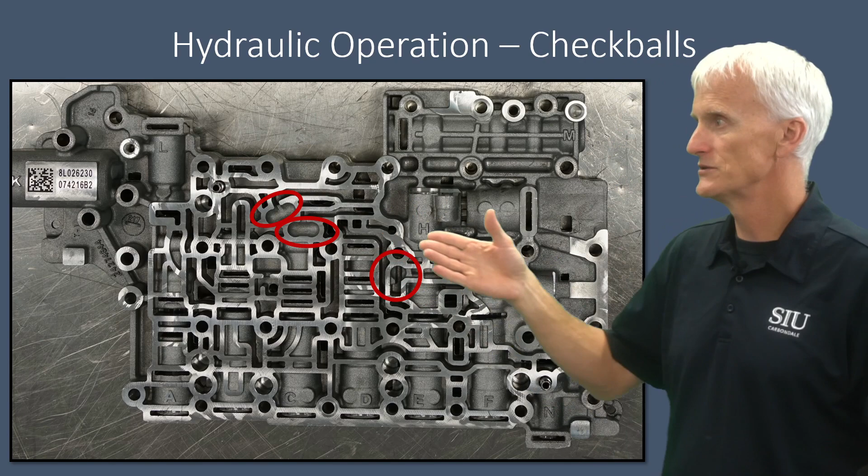You're going to see the valve bodies have these little bathtubs or single spots for check balls. But you're also going to find that depending on the year of the unit, you might not have check balls in certain spots. And you also might find out that if you have start-stop, you might have check balls in certain spots, whereas if you don't have start-stop, you won't have it at all. So definitely pay attention to the location of the check balls.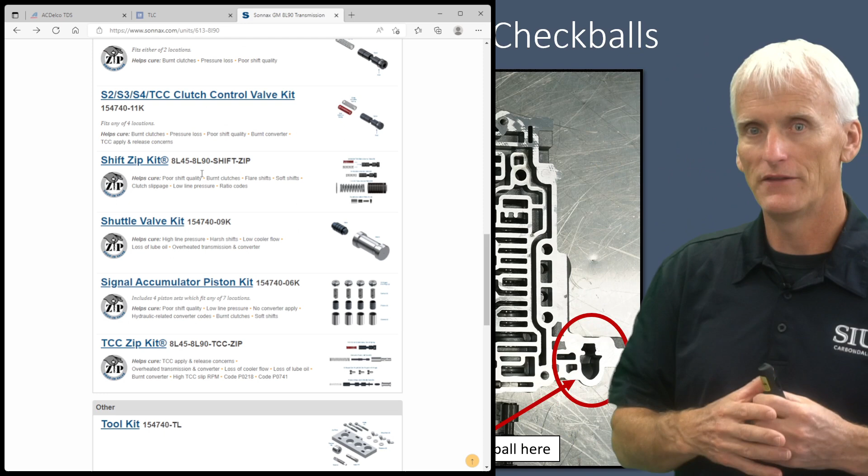I will tell you this, Sonnax has a nice chart on their website. When you pull any of the instructions down for their zip kit, you're going to see a nice layout that explains where check balls are supposed to be located.

So for this valve body, I'm actually only going to vacuum test the clutch regulator valve for C3, because Sonnax sells a special tool that allows you to vacuum check these. It basically replaces this valve with a dummy valve, and they have it for the different size valves that are in here. The reason why they do that is because there's that tiny hole in there, and if you vacuum check this, vacuum is going to leak out through that hole.

But what I'll do is just cut a little strip of electrical tape and wrap it around to cover that hole. I'm not going to do that on every single one, but I figured I'll go ahead and do it on the C3, because that is the clutch that failed on this transmission. So the other ones I went ahead and put back together and put in.

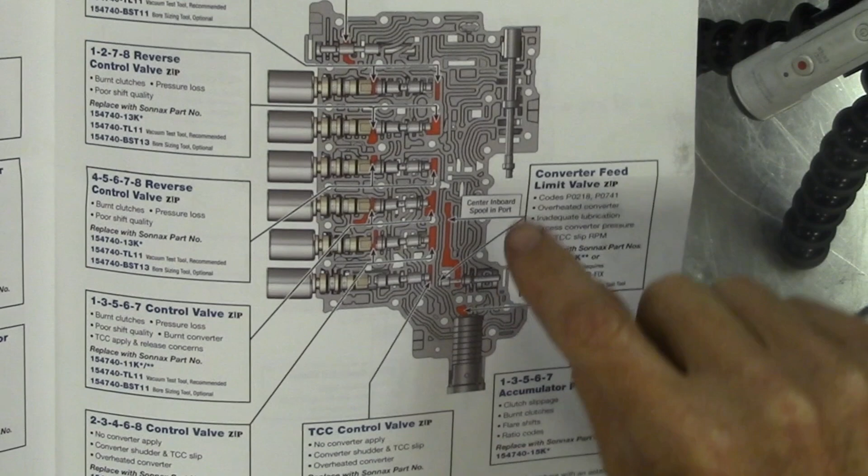So you can see these are the ends, that's the spring end of all these pressure regulator valves. And that's the one where you're either going to want to use their recommended vacuum test tool, or you're going to have to close off that hole.

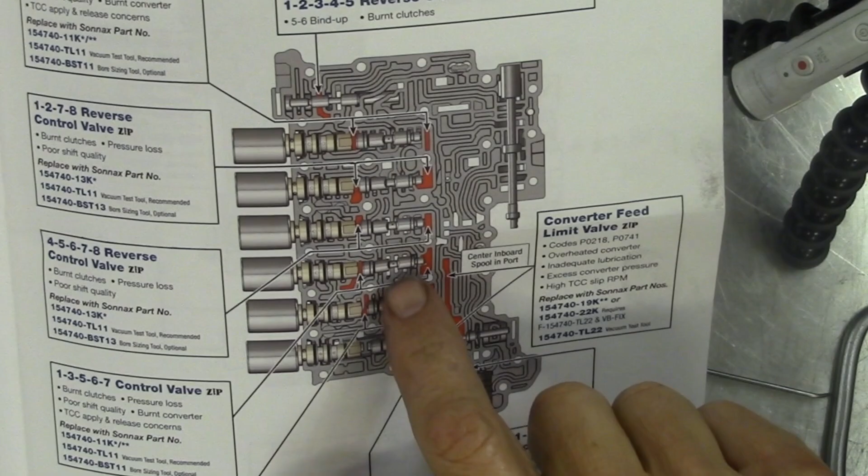So on the C3 that I'm using, this one right here, I'm going to go through and put a piece of electrical tape on the valve - something you probably don't want to forget to take off when you're done with it.

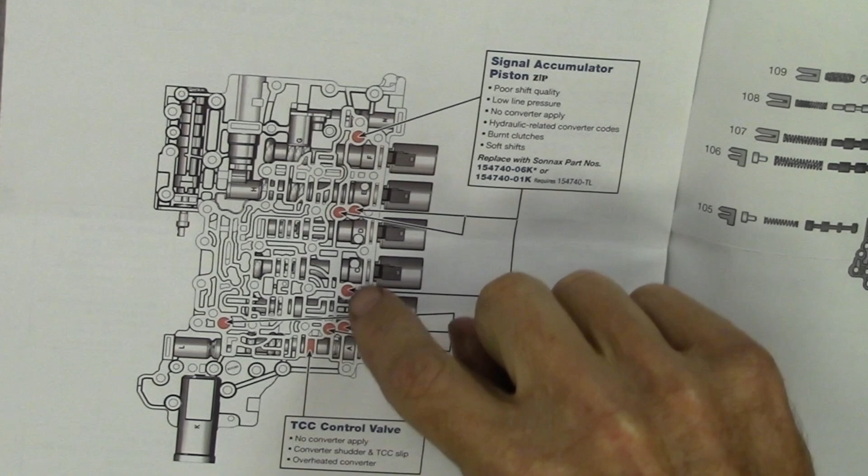And then some of these others might have special instructions too. There's actually also on this converter feed limit valve, a little passageway there that you're supposed to plug off. And then with those accumulators, we can go ahead and place some suction on top of those to see if those are sealing up or leaking.

Good seal, looks good. Next, that one's low - that's definitely a bad one. We'll mark it. This one is questionable. Nope, that one's actually really good. This one's a massive leak, only pulling 1 inch - definitely a bad one. This one's not sealing up very well either, getting about 5 inches. 11 inches, 15 inches - both of those are pretty bad. That one's probably pretty good. So we got 4 bad ones, 3 good ones.

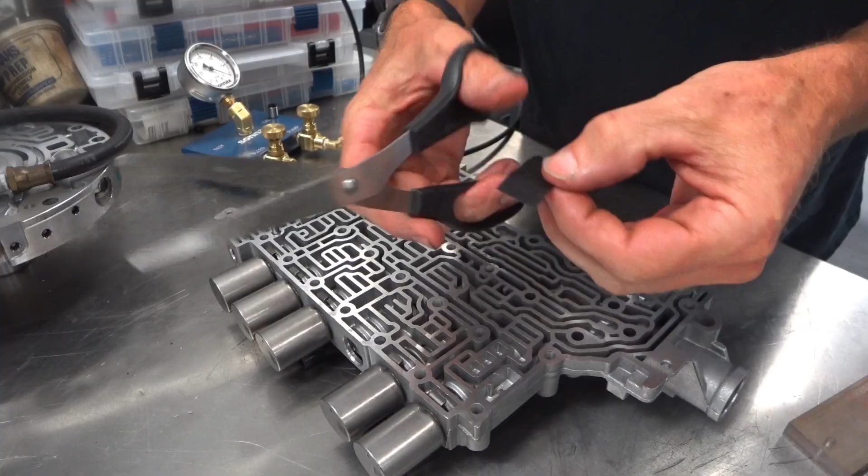So for a shift valve, we're going to want to plug off that hole. I'm going to use a piece of electrical tape, and hopefully this will do a good enough job to seal that off.

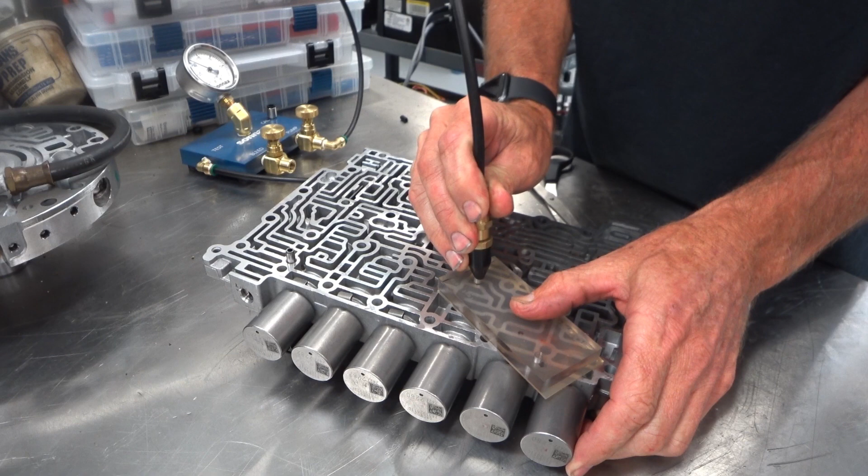Actually seals up pretty good. Got 20 inches on the solenoid side. Got 24 inches on the reaction land on this side.

We can go ahead and check our 13567 accumulator while we're here, right through that passage. 24 inches on that, that's a good seal. That's a pass.

Then our lube regulator valve is going to be that little guy right there. Got about 18 inches. So as you can imagine, a vacuum test can save you a lot of money.

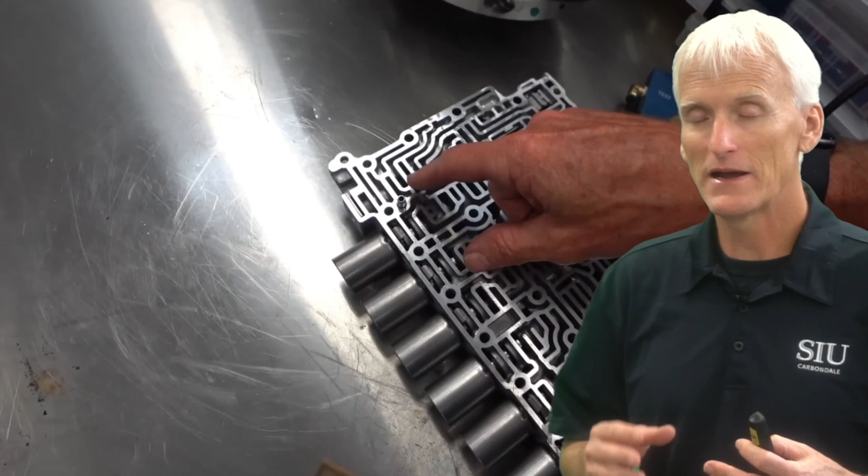Now, it might not help the solenoid situation out so much if you suspect a solenoid is bad. If you do suspect a solenoid is bad, you're supposed to put a whole new valve body in because you cannot get individual solenoids. You might be able to pull a solenoid out of a core and do some swapping, but it's recommended against that because these solenoids are all characterized by flow rates, and they're taught to the computer what those flow rates are when you go through and install the valve body.

You put what they call a PUN number in there, a part unique number, and we're going to learn about this in the electronics lecture, which is coming up next. But those PUN numbers teach the TCM what flow rates and solenoid characterizations your valve body has. So if you're swapping parts around, you're going to lose that characterization.

And that's actually a good thing to talk about if you're pulling these solenoids out. Making sure they go back in their same spots is very important too.

But at least now we know that if we vacuum test this, if we find poor results, that the aftermarket, like Sonnax and TransGo, they've gone through and they've created fixes for the hydraulic side of things, for the valving side. So at least we know we don't have to trash an expensive valve body because an accumulator bore is worn out, or because a pressure regulator is not sealing like it should, or a torque converter limit valve.

If you're not into vacuum testing yet, I'll try to put a little link up here somewhere, basically a link to a video that I've created where you can make an inexpensive DIY vacuum test station. Costs you about $100 or something like that. So in reality, if it saves you from buying one valve body, it'll pretty much pay itself off.

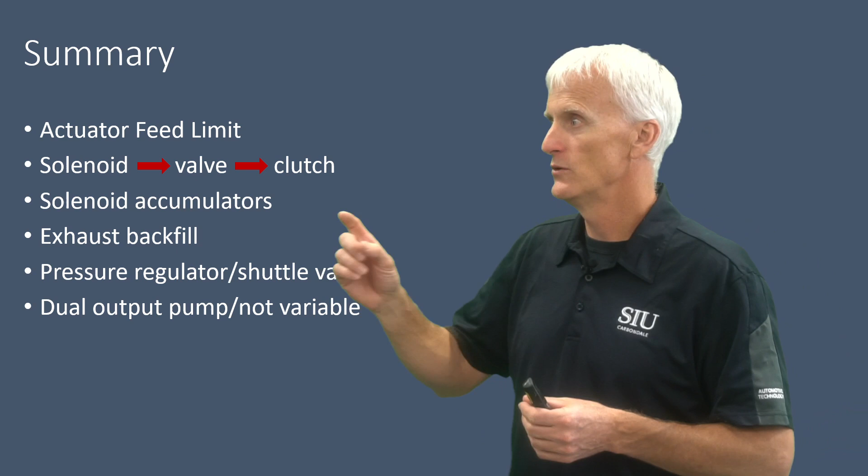We looked at exhaust backfill and how unique that was, how they keep these clutch circuits filled when they're not applied. We keep them filled with low pressure.

And we also looked at our pressure regulator valve and the shuttle valve and how it operates a little different than our typical GM pressure regulator valves and boost valves that we're used to.

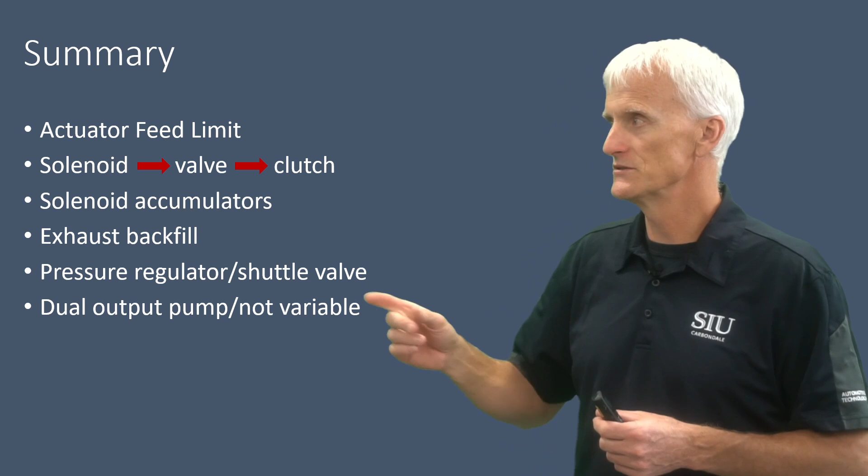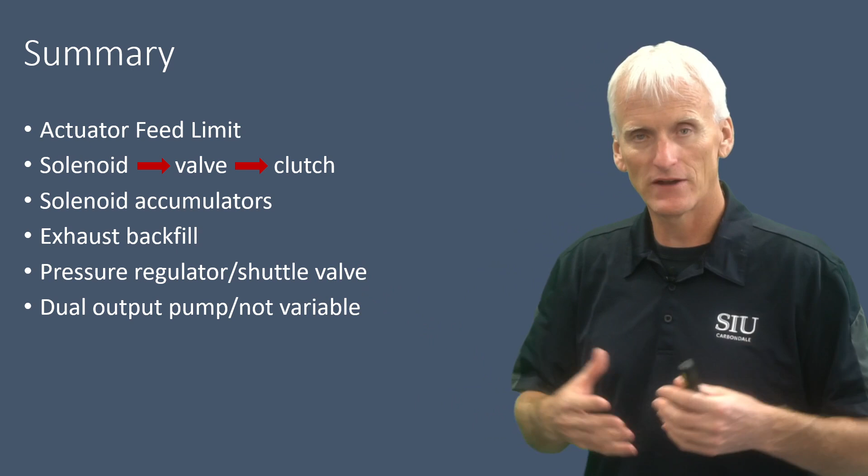And also, along those same lines, as we looked at their dual output pump, it resembles that Jatco CVT pump, uses those little vanes, and also talk about this in that rebuilding particulars video because they have an issue with that pump not wanting to prime, especially if you replace a valve body and those little vanes are kind of stuck in there. So in the modifications video and in the rebuilding particulars video, point that out, show you ways around that. Also showed that in the overhaul video, but hey, you can never repeat stuff enough because sometimes it's the second or third time before you finally get it.

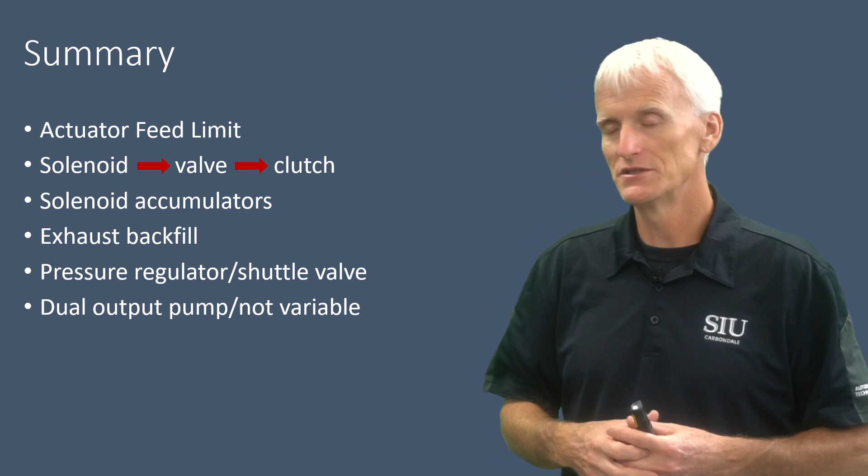And that's about it for this one, so we'll see you on the next one, which is the electronics lecture, where we talk about electrically how this transmission operates.